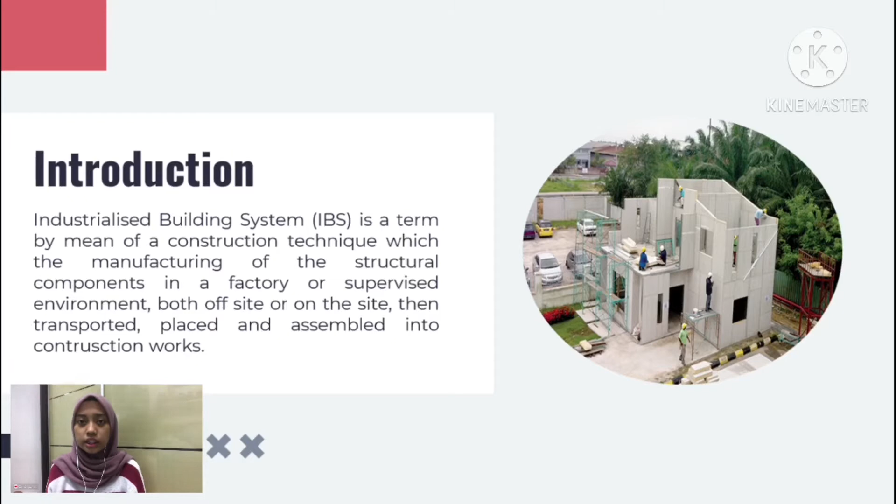The Construction Industry Development Board (CIDB) Malaysia promotes the usage of IBS because it will increase the quality and productivity of construction through various training, promotion programs and incentives. IBS is not a new concept in Malaysia.

It was introduced in Malaysia in the 1960s after the Ministry of Housing and Local Government of Malaysia visited several European states and measured their lodging and development plan. After their visit on 12 May 1964, the first undertaking utilizing IBS started by the authorities.

The first IBS project is at Pekeliling Flats KL, better known as Tunku Abdul Rahman Flats. About 22.7 acres of land along Jalan Pekeliling, Kuala Lumpur was devoted to the undertaking, consisting of 7 blocks of 17 storey level, 3,000 units of low price level and 40 store lots.

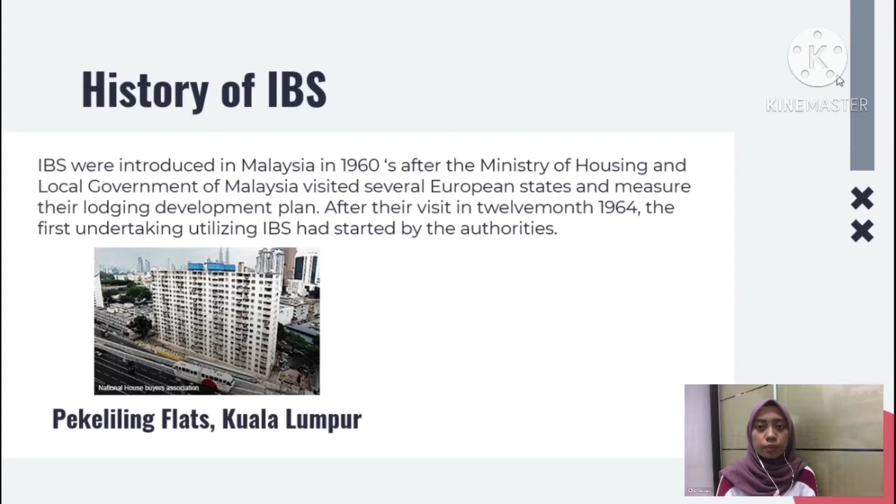The second lodging undertaking initiated by the authorities is the Rifle Range Flat Penang, consisting of 3 blocks of 18 storey flat and 6 blocks of 17 storey flat at Jalan Rifle Range Penang, on 12 May 1965.

Moving on to the IBS score system. This system is to provide a systematic and structured assessment system to measure the usage of IBS in a consistent way, which can be found in construction industry standards.

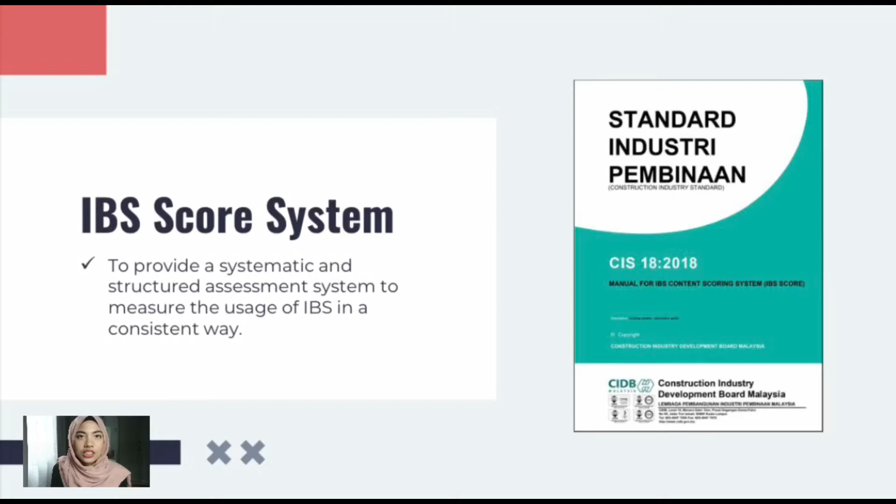This is the principle of IBS score. The first is the use of fabricated and precast components, off-site production of components, the use of standardized components, repeatability, and lastly modular coordination (MC) in building MS 1064.

A higher IBS score is a reflection of higher productivity, reduction of site labor, lower wastage, less site materials, cleaner environment, better quality, neater and safer construction sites, faster project completion, as well as lower total construction costs.

Moving on to the types of IBS system, which involve 5 types. The first one is precast concrete system. This is the most common IBS system.

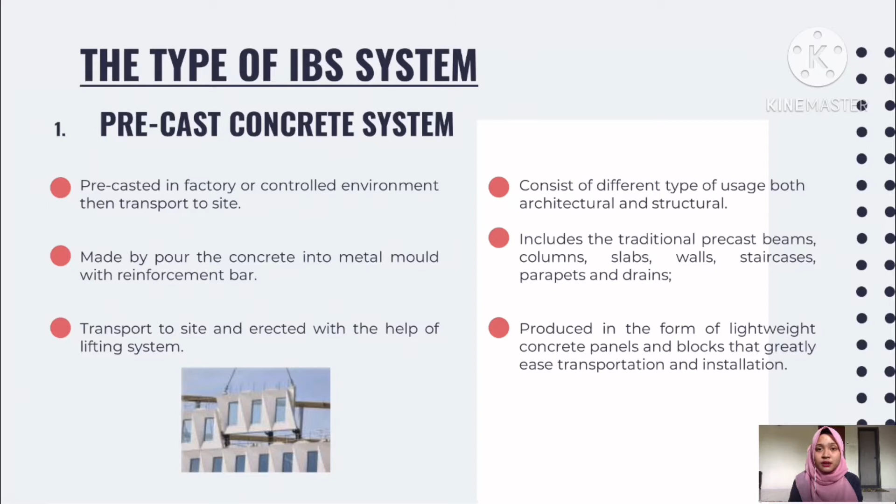The precast concrete is made in a factory or in a controlled environment at site. Then it will be transported to the site and erected with the help of lifting systems such as crane. Precast concrete consists of column, beam, slab, staircase and many more.

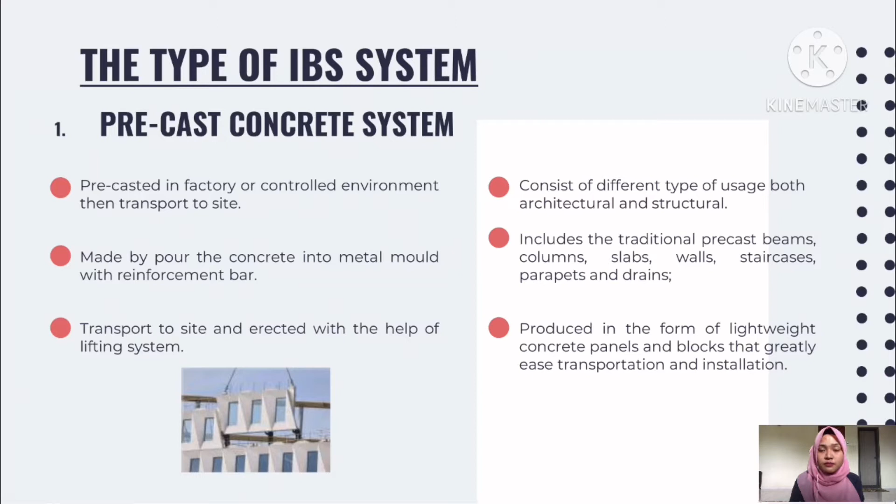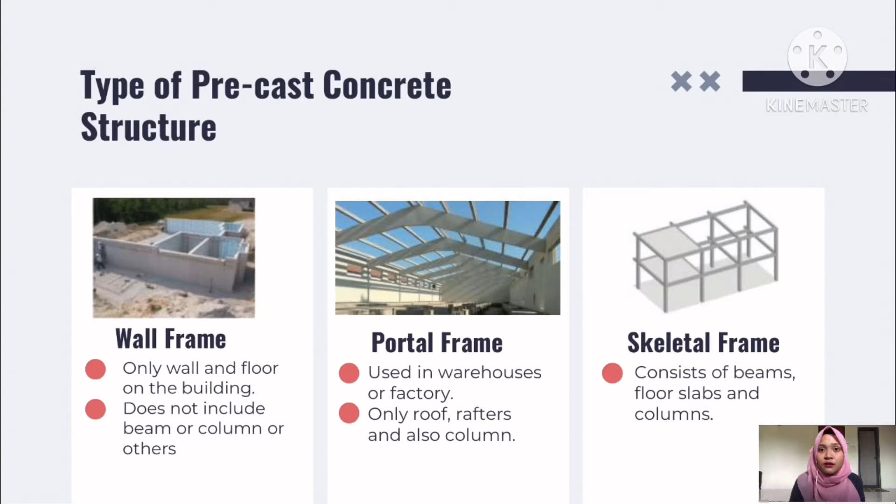There are 3 types of precast concrete, consisting of wall frame, portal frame and skeletal frame. Wall frame only consists of the wall and floor of building. The portal frame is usually used in warehouses and factories, involving only roof, rafter and column. The skeletal frame contains the column, beam, floor and slab.

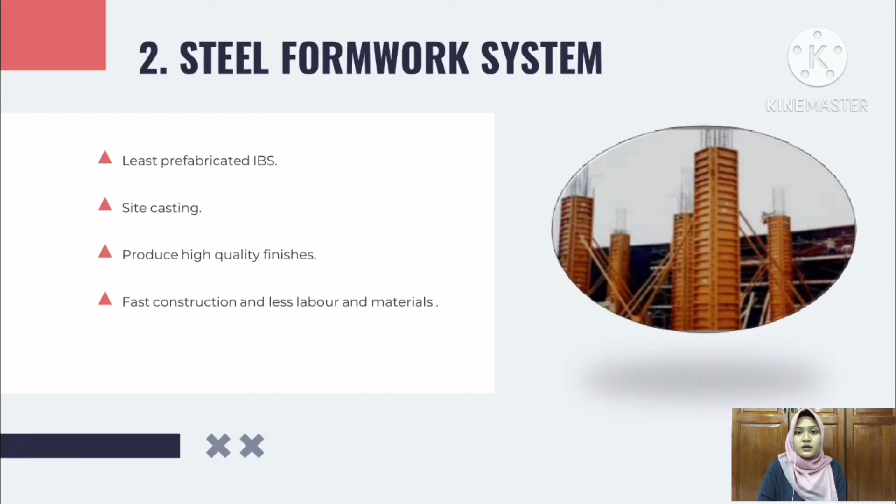Next, the second type of IBS system is the steel formwork system. This system is considered the least prefabricated system in IBS as it involves site casting, so it's subject to structural quality control. The product of this system usually produces high quality finishes and usually eliminates the need for plastering.

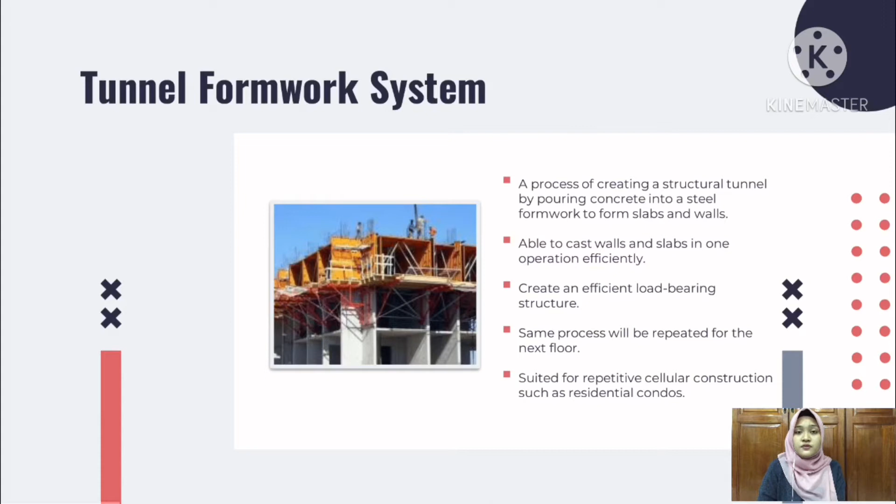Tunnel formwork system is one type of the steel formwork system. It is a process that forms slab and wall by pouring concrete into the steel mold. The system allows the contractor to cast wall and slabs in one operation efficiently. The same process will be repeated for the next floor of the building, so it is a suitable system for residential condos or apartments that involve repetitive cellular construction.

Furthermore, the third type of IBS system is the steel framing system. This system is commonly used with precast concrete slab, steel columns and beams, as well as portal frame system.

In recent development, the system includes the usage of light steel trusses that consist of cold formed steel channel and steel portal frame as an alternative to the heavier traditional hot rolled sections. So it is widely used for skyscraper buildings and large factories and exhibition halls that require wide areas.

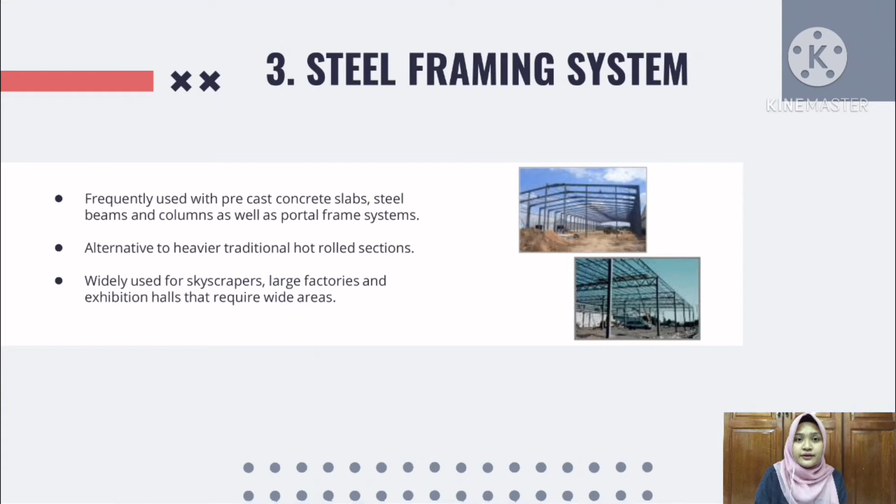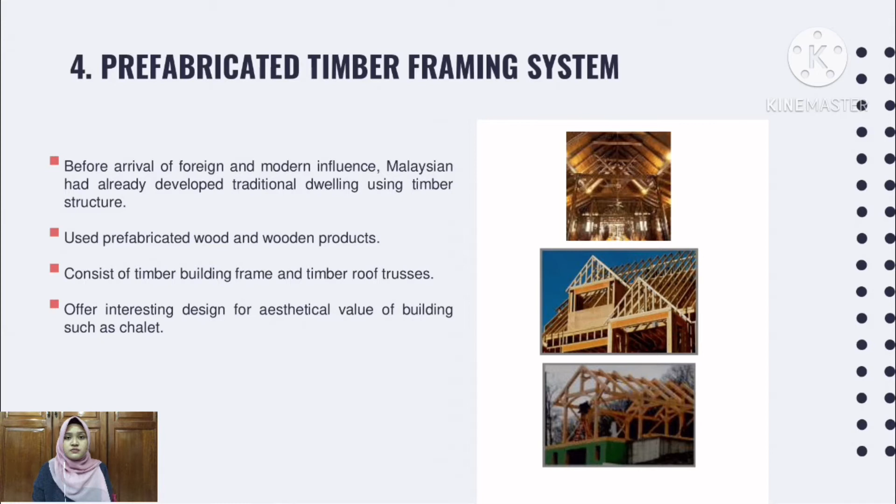Next, the fourth IBS system is the prefabricated timber framing system. This system mostly consists of building frame, the column and beam, and roof trusses. This timber system actually has its own niche market that offers interesting design with high aesthetical value for buildings in tourism industries such as chalets for resorts.

Lastly, the fifth IBS system is the block work system. The construction method of using conventional bricks has been revolutionized by the development and usage of first, the interlocking concrete masonry unit, and second, lightweight concrete blocks. By using this effective alternative system, the tedious and time-consuming traditional bricklaying tasks are greatly simplified.

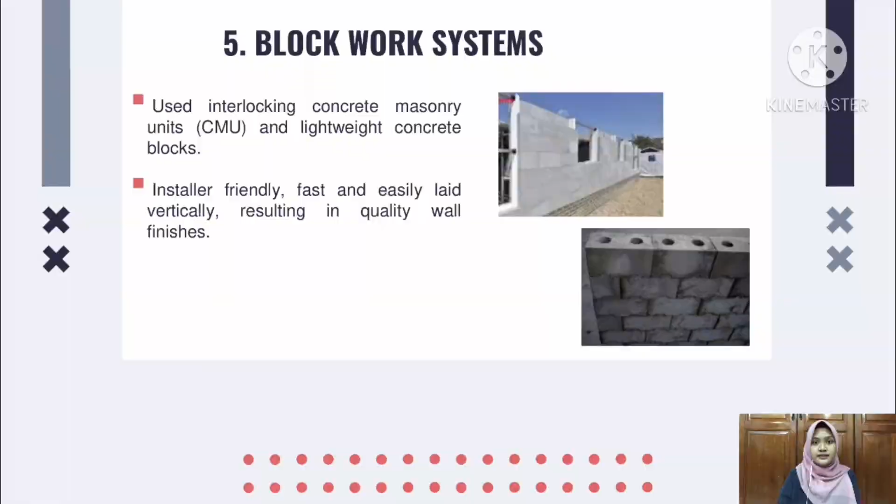Moving on to the next slide, we look at the safety precautions of installing the IBS system. In every construction, of course, safety measures need to be taken. First, the health and safety.

Employers have the responsibility to ensure health and safety of all employees in the work environment. So employers must provide and maintain a safe working environment and ensure all employees are well informed of information regarding emergency procedures, use of safety equipment, and so on.

Second is training. Employers must appoint an appropriate, experienced person who will be able to supervise employees who are not yet skilled and experienced, as a way to improve their knowledge and skill to be able to work safely. Third is hazard.

In construction, many processes such as casting, transporting heavy machinery or equipment involved could give rise to many hazards. So employees need to be reminded and aware of possible hazards.

The last one is safe lifting. To carry out a safe lifting process, they need to ensure that every piece of equipment and machinery is well maintained, and that employees use the right equipment for the right job.

Next is the case study, one of the buildings in Malaysia that uses the IBS concept. The name of the building is Sekolah Jenis Kebangsaan Cina Damansara, located at Petaling Jaya, Selangor. It consists of 4 blocks, and the project site is 2.1 hectares.

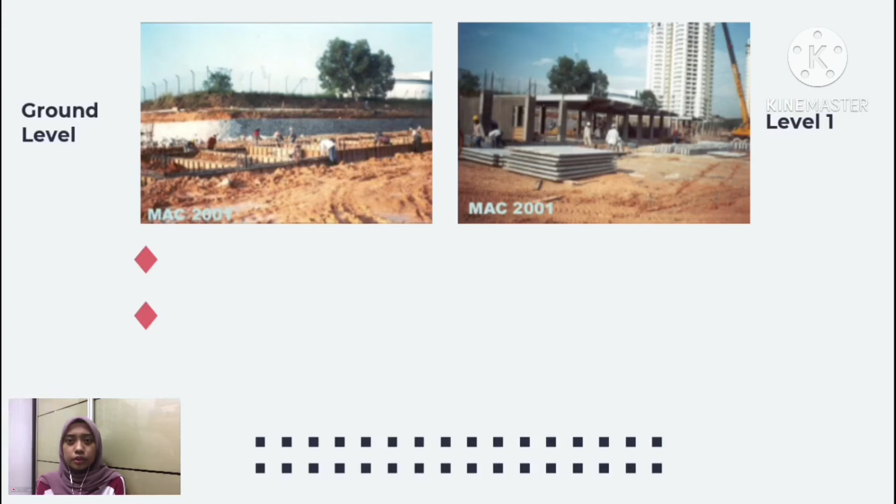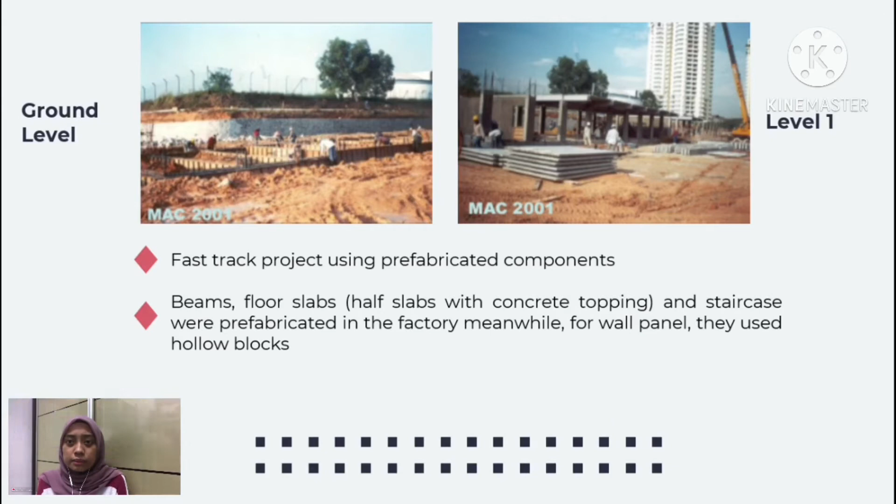Beams, floor slabs, and staircases were prefabricated in the factory. Meanwhile, for wall panels, they used hollow blocks. For floor slabs, they used half slabs with concrete topping, the details of which I will show in the next slide.

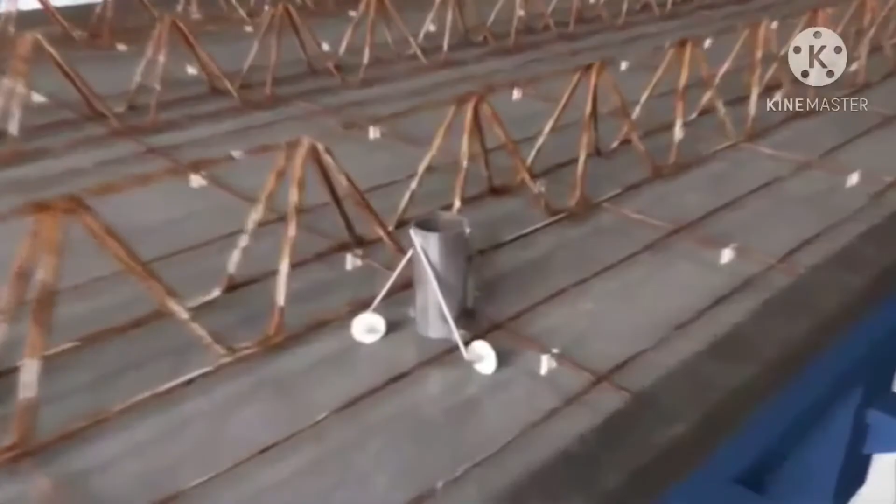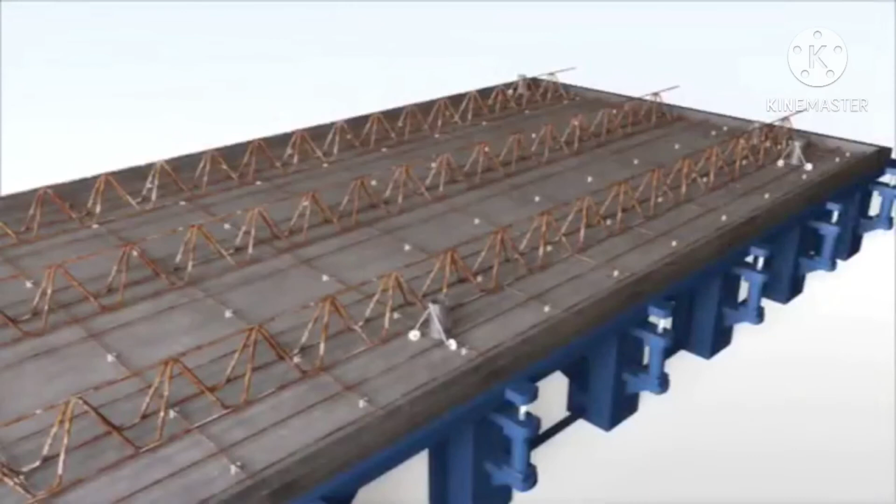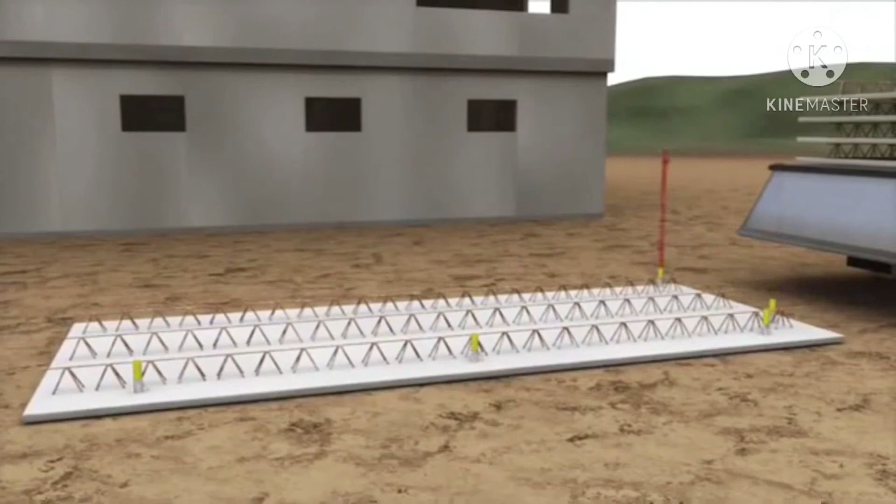In terms of quality, this type of construction only costs half of the normal cost, and will also lessen the risk of the building having cracks and deflection since the lattice girder is already installed. It also becomes a convenient type of construction because the lattice girder makes it easy to lift the slabs.

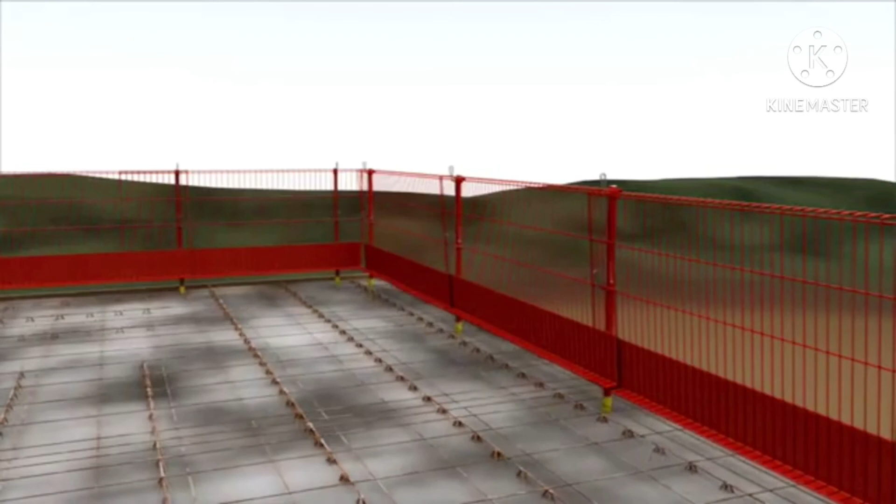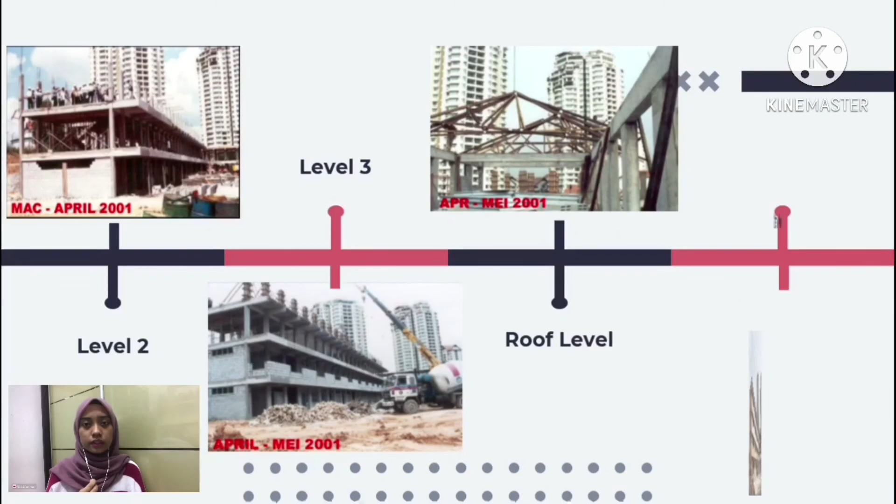So the benefits are shorter construction time, cost saving, as the components are made of steel, aluminium, or other materials that allow for repetitive use, and lower labor dependence, as IBS components are produced in the factory.

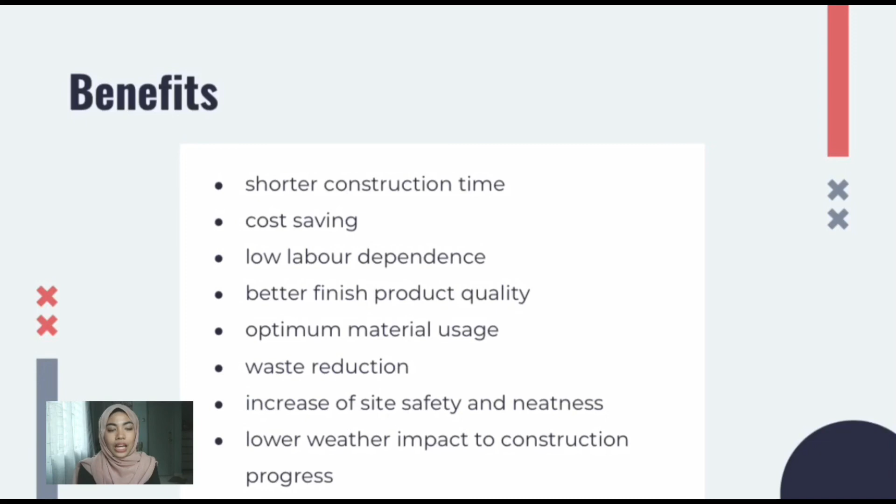Better finished product quality due to careful selection of material, use of advanced technology, and better and strict quality assurance control, since production in the factory is under a sheltered environment. Optimal material usage, waste reduction, increased site safety and neatness, as utilization of IBS components leads to less construction process, especially wet work at site, and lastly, lower weather impact to construction progress.

These are the challenges of the industrial building system. First, IBS adoption must be executed in line with the efficiency and effectiveness of property development processes. Second, the high cost of machinery due to low economy of scale. Next, negative perception on the quality of IBS. Lastly, worker skills in preparation for adoption of IBS.

IBS is an evolution of construction using new and innovative techniques rather than a revolution. IBS should move up the degree of industrialization from prefabrication to reproduction through innovation. The reproduction level of industrialization will involve the whole project life cycle, from planning to maintenance.